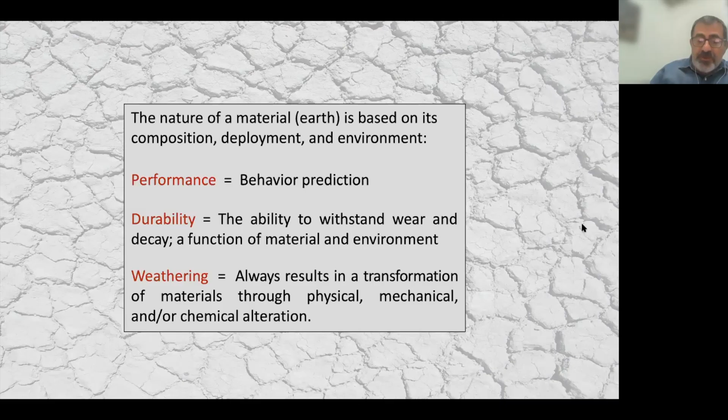The performance of all earthen building materials begins with soil composition, including clay chemistry and grain size distribution, or granulometry, which significantly determines a soil's properties and how it has been best selected for use in construction.

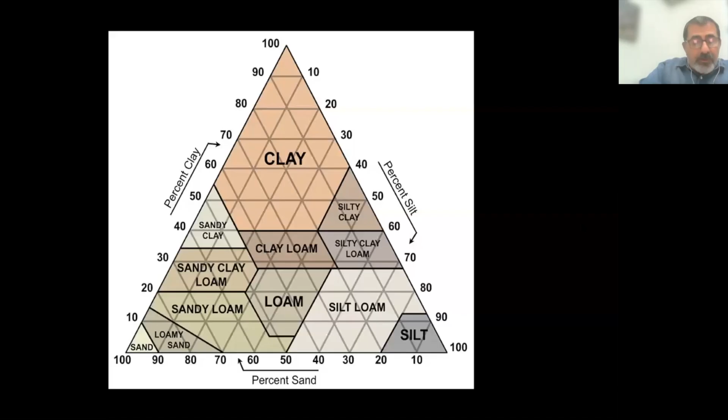Those of you who are involved in earthen building know that the type of soil very much dictates how that soil can be used and limits the options in construction. This is best expressed through soil classification systems, which for engineering purposes focuses on grain size distribution of the clay, the silt, and the sand fractions.

Over 50 years of modern scientific study of earthen heritage, and even longer empirical knowledge of earthen building, has resulted in a general understanding of how earthen architecture weathers. I just show you two examples here.

At the micro scale, clay swelling and shrinkage coupled with decohesion of the clay-silt-sand agglomerate are the fundamental mechanisms responsible for soil destabilization, which will eventually lead to all scales of damage. It starts at the micro level, but we perceive it generally in the field at the meso and macro scale.

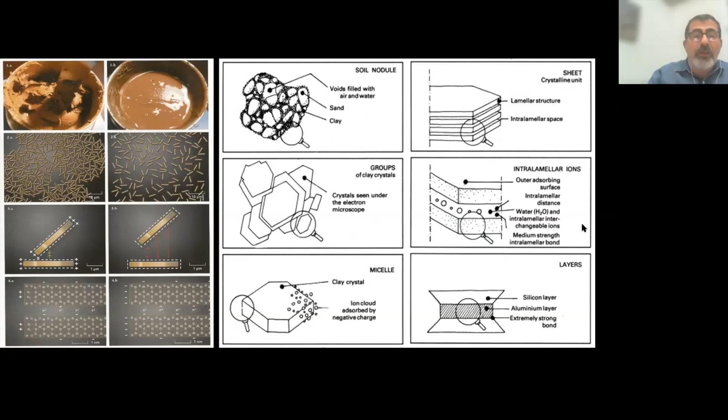We see this at these scales as characteristic conditions: coving at the top, basal erosion at the bottom, contour erosion across the entire surface, and rilling in terms of focused, concentrated damage. All of these are ultimately water-related phenomena.

These microprocesses can be aided by the presence of salts or the formation of ice within the pores of the soil, leading to additional material stress and fatigue. Eventually, with the loss of surface and reduction in wall thickness, the walls will begin to take on their characteristic weathered shapes and contours, cracking, and so on. This all depends on the cyclical weather patterns, the wall geometry, and any interventions made in the past.

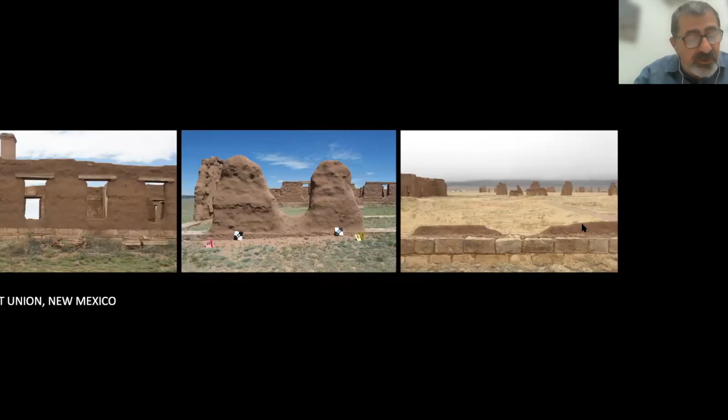Walls will weather to fanciful contours and eventually lean from basal undermining and a lack of lateral support from the original architecture, eventually leading to destabilization and collapse, as you see here on the right.

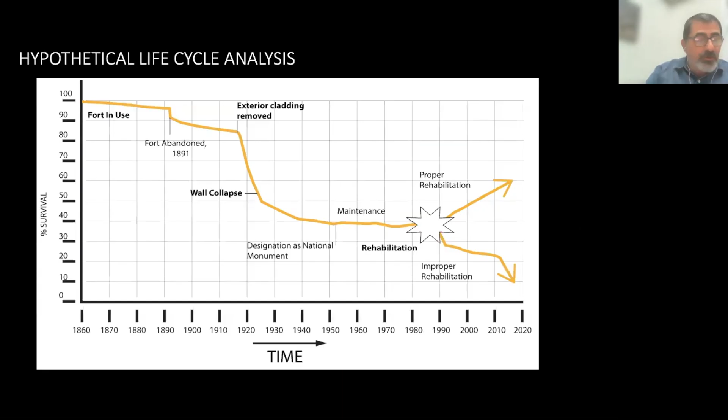Performance scenario prediction, an example of which you see here for Fort Union, is a useful evaluation method, even more so with climate change and the unanticipated responses of traditional materials and construction systems to these new environmental stresses. So let's take a simple and then a complex look through the aid of animation to see the common scenarios of earthen wall deterioration.

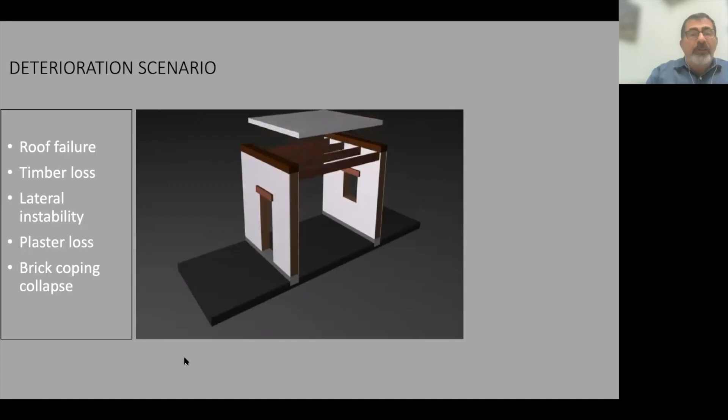As we go from a complete building to an incomplete building, we lose the roof, we lose the lateral bracing often provided through the roofing structure, and we lose the protective plaster surfaces, exposing the adobe or earthen core. We further lose additional protective elements such as brick coping or timber coping. Then we begin the next phase.

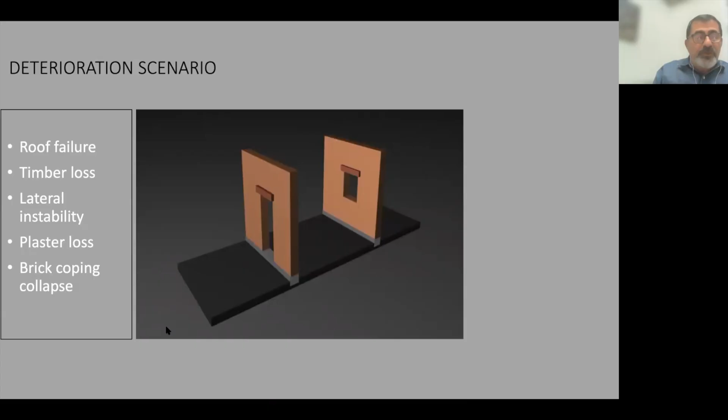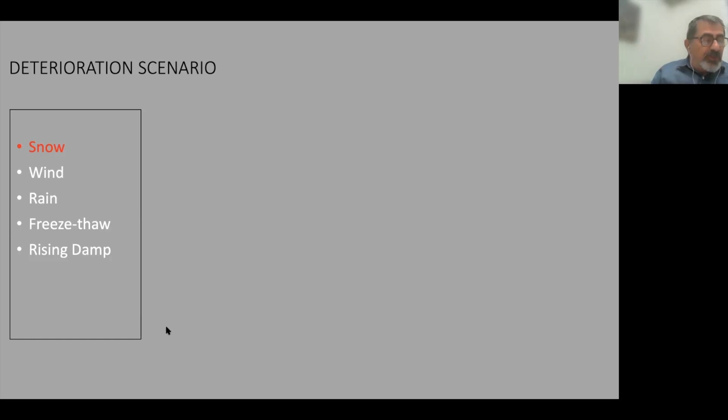Here we see the scenario which leaves the adobe nucleus or earthen nucleus vulnerable to further stressors. These stressors we understand in terms of individual different aspects of weathering, and they result in a dominant response mode. I'm just going to go through these very quickly.

Snow, particularly as a reservoir of moisture, can stay accumulated for months, depending on the orientation and protection, and eventually overwhelm the system. We'll see more of that in a minute.

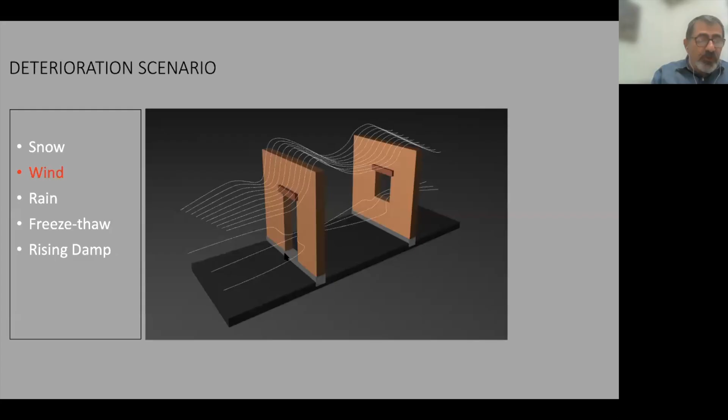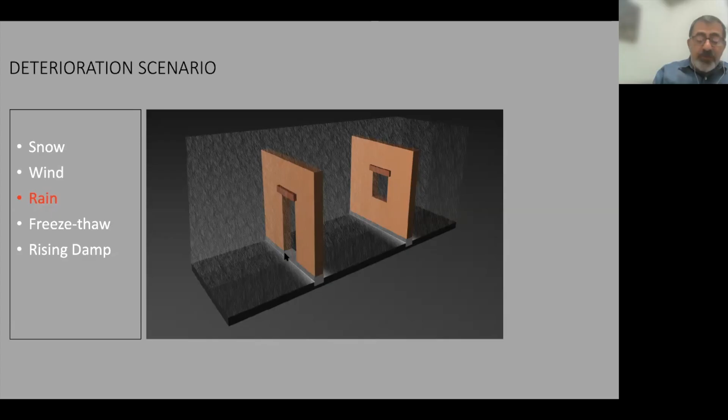Wind can provide unseen forces, often complex in terms of positive and negative wind loading. Rain, of course, falling or damp, will typically erode unprotected vertical and horizontal surfaces in a gradual disintegration, creating the common rounded forms, rough surfaces, and coving at the top.

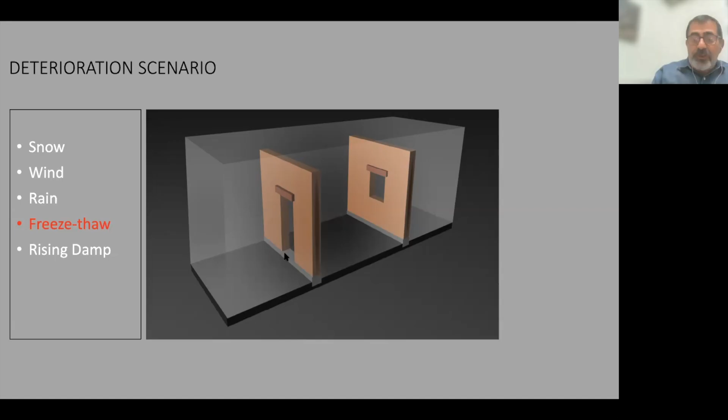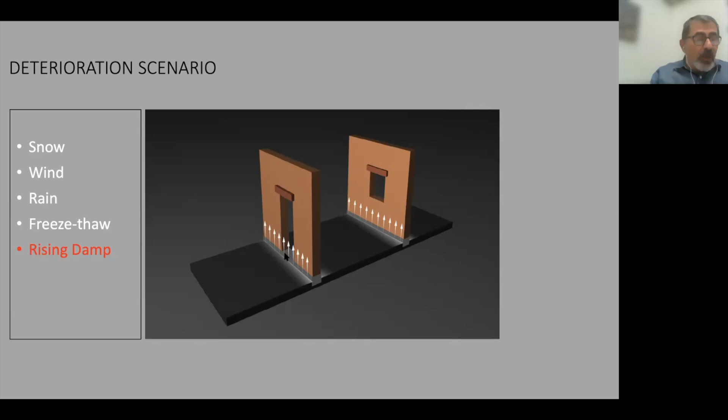Freeze-thaw will occur anywhere there's moisture, causing micro damage which eventually accumulates into meso and macro scale. Finally, rising damp or ground moisture, with or without the aided damage from salt crystallization, will cause a loss of bearing strength, deformation, and collapse. The result to the overall wall is basal erosion and coving. Again, we can see these in this animation.

These are processes familiar to most. Here we see coving at the top, basal erosion at the bottom. Then we will see the walls deforming, both contributing to an unstable wall cross-section. Then we get a whole host of characteristic out-of-plane phenomena, which cause the walls to bend, lean, pivot, and hinge.

Okay, I hope you can see these walls wiggling and moving.

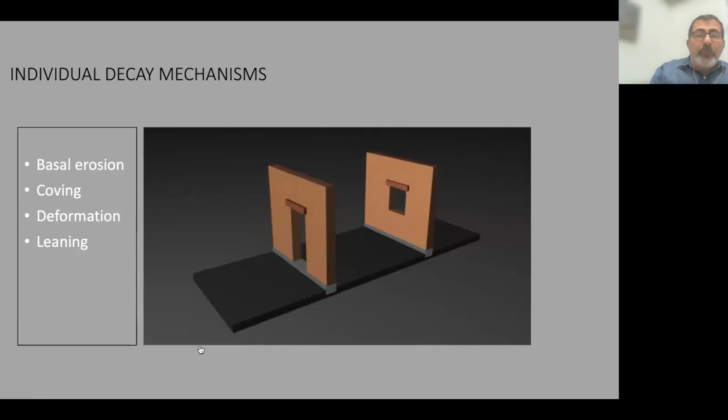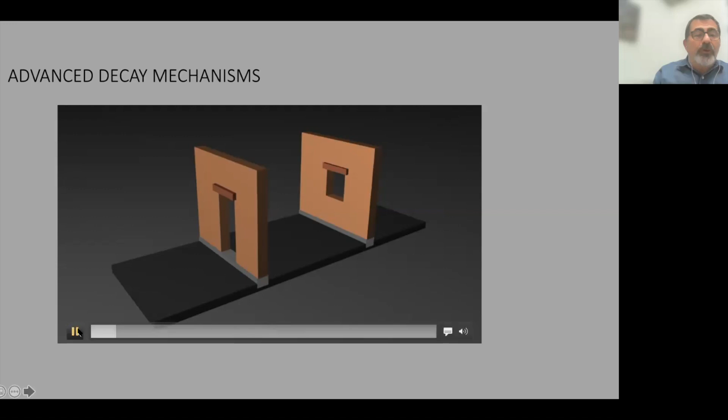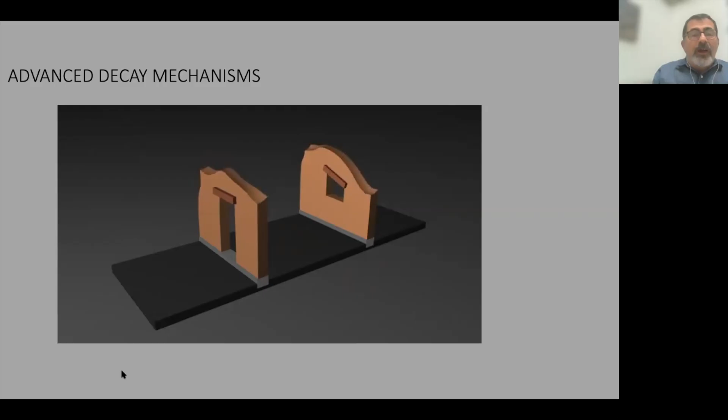Let's go on. When we look at these in combination, we have a perfect storm of earthen deterioration. Those of you in the Southwest certainly are familiar with these resulting forms. Remember, we tend to see the in-process or final form. All deterioration, particularly earthen deterioration, is like watching a film where you're at any given moment looking at one frame in a continuum of evidence.

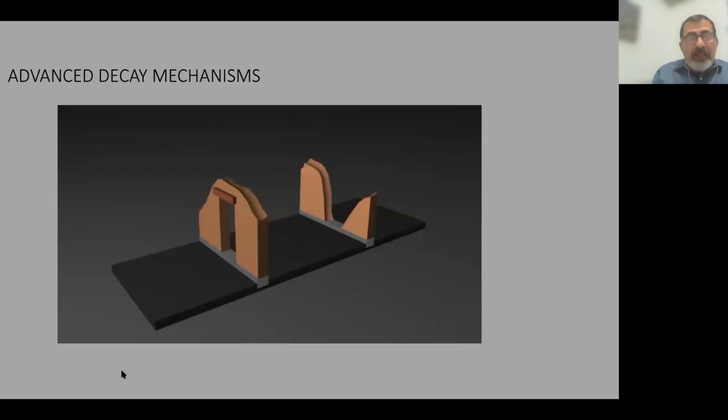Here we see the characteristic geometries of the wall creating the forms we see today through differential erosion. There is little evidence-based research which has attempted to study or explain the range of variables, alone and in combination, that influence earthen building performance, including deterioration at the macro or site scale.

There's been tremendous advances in understanding soil performance and earth material performance at the micro scale, but we have not done a good enough job looking at the combination of factors in tandem that create a synergistic decay phenomena.

While all earthen structures display similar mechanisms of failure based on shared properties and construction methods, understanding the variables of deterioration in terms of type, extent, and frequency as a function of intrinsic and extrinsic factors would allow conservators and resource managers to make better predictions about site risk and vulnerability, and therefore more effective treatment decisions. Evan is going to talk about current research we've been conducting at the University of Pennsylvania at Fort Union National Monument with the National Park Service on developing a model for determining site vulnerability through a series of discrete studies of adobe performance at the micro, meso, and macro scales.

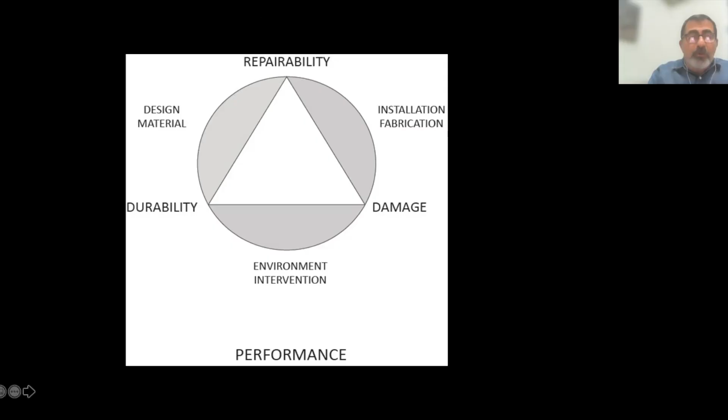I'm going to pick up from where Frank left off and try to provide a little more detail into some of these concepts in terms of earthen deterioration. Particularly, I want to present this concept of looking at earthen resources and earthen architecture from a systems approach, borrowing some concepts and terms from general systems theories that came out of the 70s in terms of how we understand things as open systems.

From a diagnostic perspective, earthen structures are some of the most complex that we have. They're also some of the most climate sensitive, which feeds some of that complexity. And while we can break things apart into certain variables and factors to monitor, the whole is greater than the sum of the parts from a systems perspective. I think a lot of people here today understand that.

I just wanted to show a quick picture. I was on site the other day at Pecos National Historical Park, and in one photo it's so hard to even summarize all of the various complexity we can see in an earthen structure. For folks who don't know, Pecos, the original walls there are treated and maintained through an encapsulation of veneers, amended veneer adobes.

Which increasingly creates a very complex diagnostic system. You've got the influence of rodent damage, which you can sort of see, you have differential weathering, differential maintenance cycles, and it's very difficult to understand how all those things are playing against one another in real time.

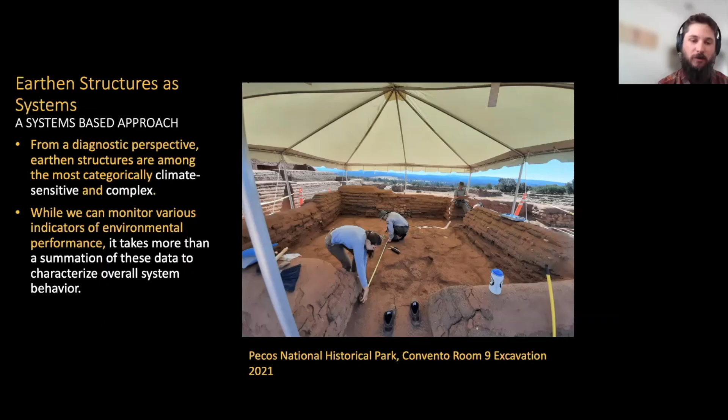So basically, taking a systems-based approach means looking at deterioration of a resource across scales. Frank mentioned macro, meso, micro, but also, when it comes to existing structures, particularly earthen structures, there's way more unknown than known variables, so we have to try to account for some of that uncertainty in our evaluation.

That usually means trying to account for material construction, initial design versus what was actually built. A lot of these things we call inherent factors, maintenance strategies, as well as extrinsic factors that look at differential orientation and exposure, things at what we call the mesoscale, which is how certain walls affect others in terms of shading and wind loading.

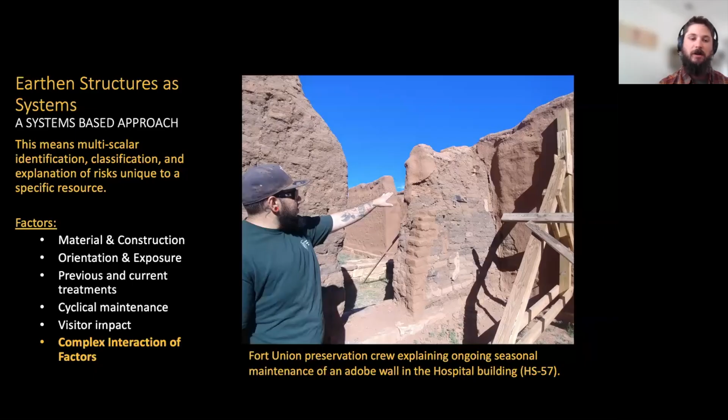What we found through these discrete experimentations at Fort Union is that really the thing that makes the most impact is the unknown or unforeseen complex interaction of those factors, which is that level of deterioration mechanism understanding that transcends the intuitive.

Generally what we found is that we have a lot of generic terminology when we apply it to earthen structures, but every earthen structure is unique. So we really want to figure out a way to catalog, characterize, and identify those generic terms, but make them - how do they uniquely manifest at a site?

At Fort Union, for example, we started with a visual index of those various factors and how they actually manifest at the site, as well as what levels of severity we see those factors manifesting at. So we try to attribute levels of severity to those things.

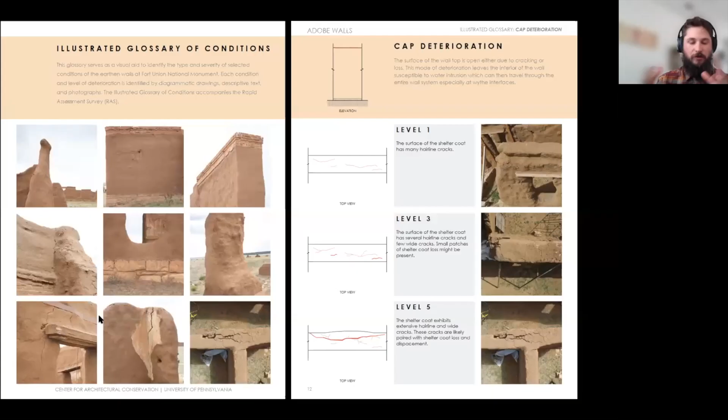Taking it that one step further, and then it's on top of this that we build the monitoring approach for the rest of the site. So now moving into how do we catalog and evaluate those factors over time through monitoring.

Again, what I said earlier, there's way more unknown than we have known factors. And a lot of that means that a lot of the factors that we're trying to understand are things that we can't quantify, things that we can't turn into numbers, so to speak.

So I'm going to talk a little bit about how we try to develop something that was flexible to incorporate both qualitative and quantitative data formats, and to try to build this comprehensive picture of how the walls and the site were performing as a whole.

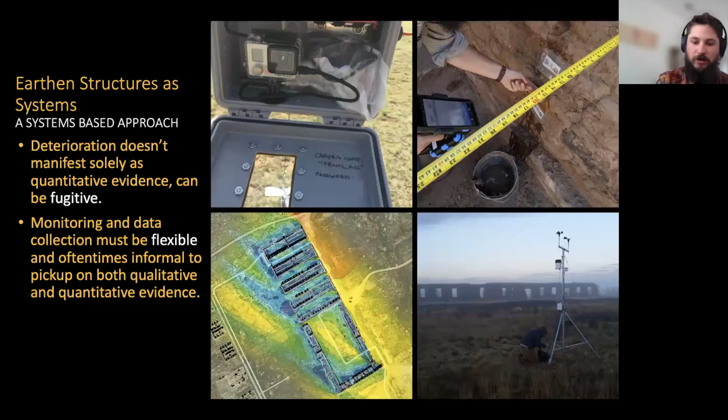Building off what Frank said, you have to really look at a resource across multiple scales, and you also have to identify where those scale boundaries exist. Where does the macro end and the meso start, and where does the meso end and the micro start? Listed there in orange are some of the different monitoring approaches that we took and tried out.

Things that are looking at, in the micro sense, material behavior, individual building unit behavior, the masonry systems.

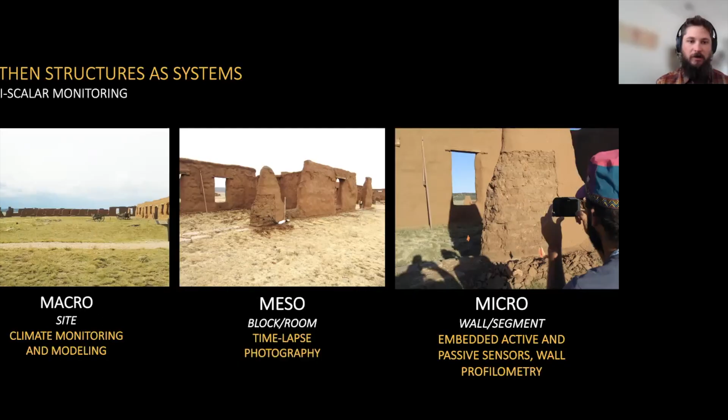And then looking at, for example, things at the meso, at the block or room level - how do the walls all interact with one another? That's looking at things like solar gain and aerodynamic shading, and then trying to build that whole picture on the macro scale - shifting climate baselines. How do we understand the larger trends from an environmental performance perspective?

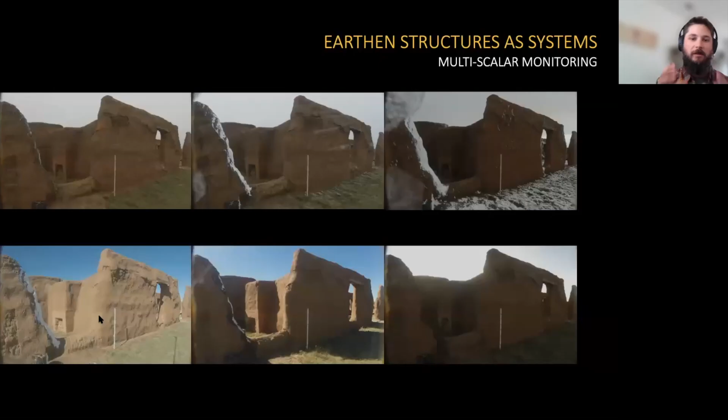And of course, snow is just basically a time lapse - it's a time-delayed moisture source. These photos are taken over 12 hours, and you can see, well after the snowstorm has passed, you still have that residual moisture on the north edges of structures. And then we begin to tie that to the very evident deterioration patterns that we see.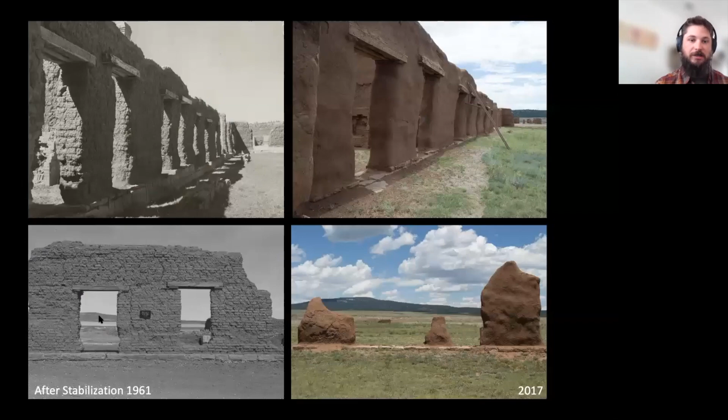In terms of embedded monitoring, we're trying to take advantage of a sort of system understanding of the walls. We originally had moisture sensors embedded, but the overall performance of an adobe or earthen structure, while very sensitive to moisture, isn't just about measuring moisture content. That's not the only piece of the puzzle we need.

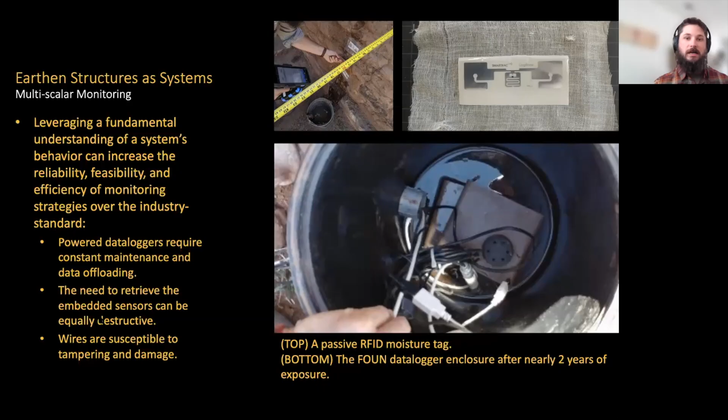However, we started to look at things like passive RFID tags for moisture monitoring, which are sacrificial in the sense that we never have to remove them from the wall. Dovetailing that with ongoing maintenance of the walls, particularly the caps at Fort Union, because falling damp through a compromised cap is a surefire formula for rapid catastrophic failure. So we try to dovetail the technology, the methodology, and an understanding of the architecture and deterioration mechanisms. We can reduce the cost of the monitoring system, ensuring its longevity and feasibility over time, as well as providing an early warning system for those walls.

Then we try to leverage computational simulation to fill knowledge gaps. It's more than just a way of creating additional data—it's really about exploring those factors and interactions of variables for which we cannot collect data. That's where computer simulation really steps in.

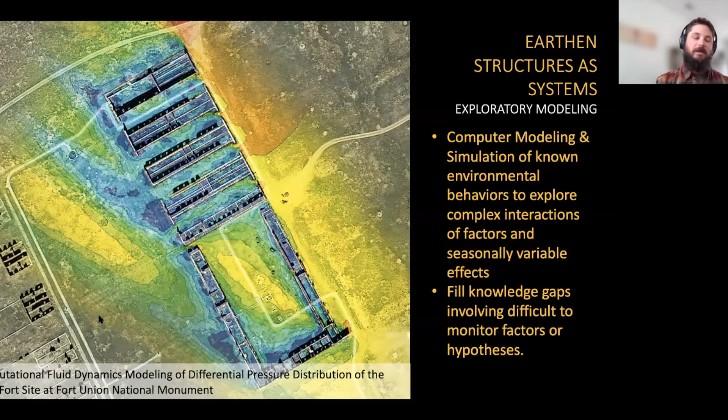Here's some early preliminary simulation we did that looks at, given average and extreme wind patterns across the site, how those walls begin to affect one another. So that's at the macro level.

Now we're looking at the meso level, trying to understand, for example, on high solar-loaded walls—walls that get a lot of sun, east, west, early morning, late afternoon—when you pair that with wind patterns, where a wall is in a negative draft zone with no wind movement or convection across the surface, doubled up with solar gain, you get a compounding increase in the heat transfer coefficient of that surface, which speeds up drying. You can see how we're starting to put these variables together through exploratory modeling.

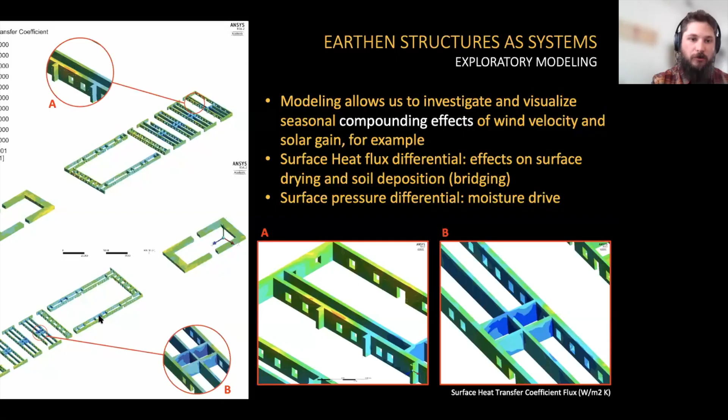Then again, bringing in the qualitative aspect: on the right you see a photo showing how wind moves across the site. Between the depot buildings you get drift snow—heavy wind comes from the south, hits the south-facing surfaces of those buildings, passes over, and the snow being carried slowly drifts down in between. Those areas are shaded, on the north side of those very tall walls, and that snow stays and lingers for months.

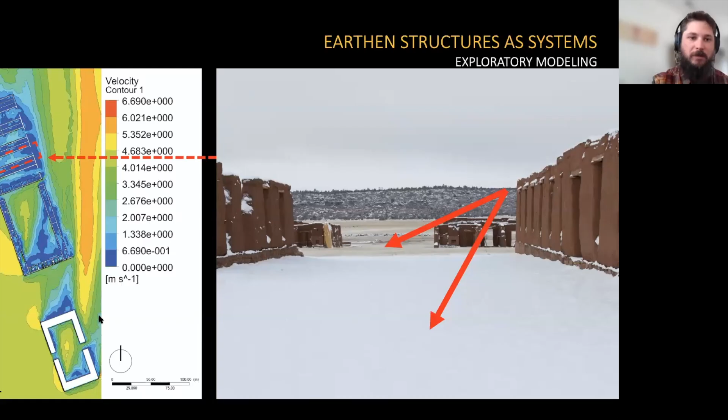That begins to explain why we see increased deterioration patterns on north faces of earthen structures—it starts to build that comprehensive picture. That's what we try to do at the end of the day: take all those various formats—qualitative, quantitative, longitudinal data—and build an environmental performance snapshot of how certain walls behave over time, seasonally, and understand how we can leverage that to improve maintenance strategies and help prioritize walls for maintenance.

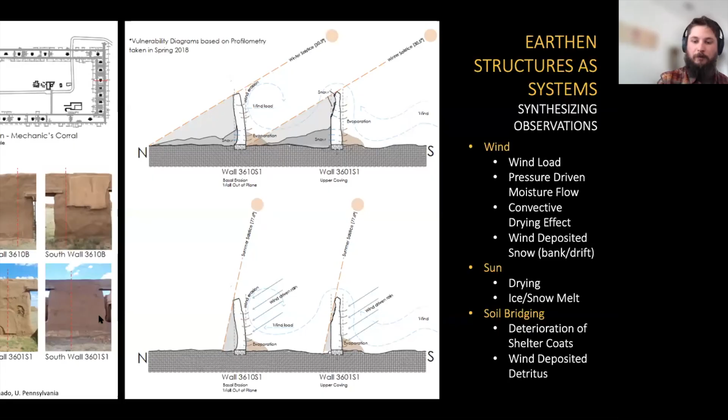In conclusion, Frank had talked about how earthen structures, through various deterioration mechanisms—leaning, basal erosion, things like that—all follow a trajectory, entropy and that kind of thing, and they all have a unique end state from a performative aspect. We just have to understand how our interventions, treatments, and understanding of what we're doing to that wall affects that end state.

So we have to take our snapshot understanding and monitoring and still try to build the overall picture of how the walls are behaving from a systems perspective, and try not to get tunnel vision on any one particular aspect.

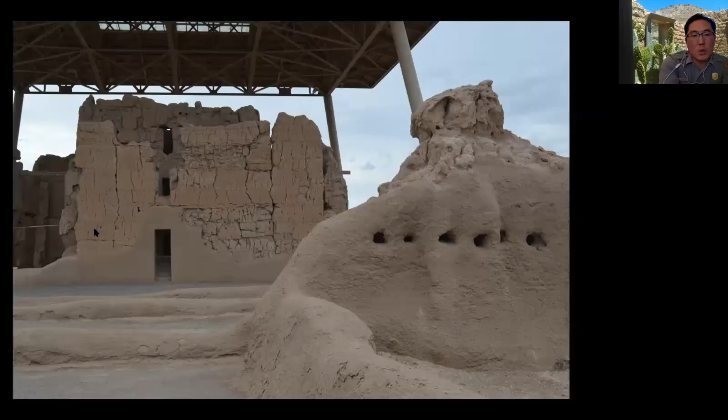Accepting weathering to be seen and to be experienced is the same. When we obscure or deny weathering, then that site may not register as inherited. Instead, it would seem new and even unnatural at times. As we've learned from the previous webinar, even decaying walls are part of a landscape that represents an ancestral connection. Sometimes letting things weather can be the most normal and respectful action.

We sometimes see at a heritage site strikingly new intervention with straight lines and sharp edges. Of course, in time, new intervention will weather. The lines will soften and the edges will chip here and there. There is a clear tension between certain interventions and the original form and fabric. Balancing this tension is a critical and necessary part of site stewardship.

In order to do that, we must first understand weathering and deterioration. At a microscopic level, deterioration is, of course, a function of selected materials. Earthen materials deteriorate rapidly, but materials alone do not bring about change. You need an environment that causes the chosen materials to behave in certain ways or to interact with other matters. For example, in this photo, the structure under the shelter experiences a different environment compared to the remains in the foreground.

How materials are put together, the design and the execution of the intent also impacts the durability. How the construct is used also determines how it'll deteriorate. An abandoned building deteriorates at a different rate than a lived-in building. Finally, how we repair a particular structure controls the rate, intensity, and frequency of deterioration. In other words, when we accept the factors that contribute to change, we can manage weathering and deterioration.

Here, I've illustrated the factors that dictate change, and common symptoms such as erosion, disintegration, cracking, detachment, delamination, falling, flaking, blistering, biogrowth, deformation, and displacement all happen due to the factors at a site. Rarely do they happen in isolation. Certain factors play a greater role than others. There is a hierarchy. Our job is to fine-tune our eyes for that hierarchy.

What I have learned is that considering all five factors has led me to an appreciation of a culture that's represented by the place I try to conserve.

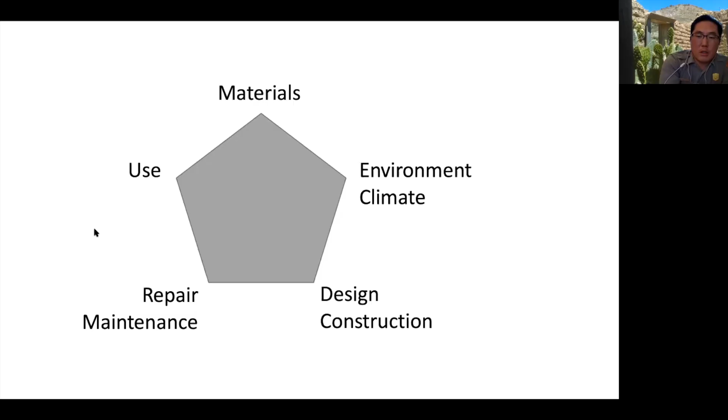Let's begin with structures of high integrity. On the left is an adobe building missing a section of stucco, revealing the masonry courses. A section of lime and sand render finished and detached. Why? Perhaps the building was left unattended for many years, or perhaps the craftsman's skill was subpar.

All of this could have caused a change. To the right, the loss of surface coat is accompanied by even more serious loss, that of partial loss of the wall itself. Did the change happen because of the same mechanism? What is different about the way water moves from the roof?

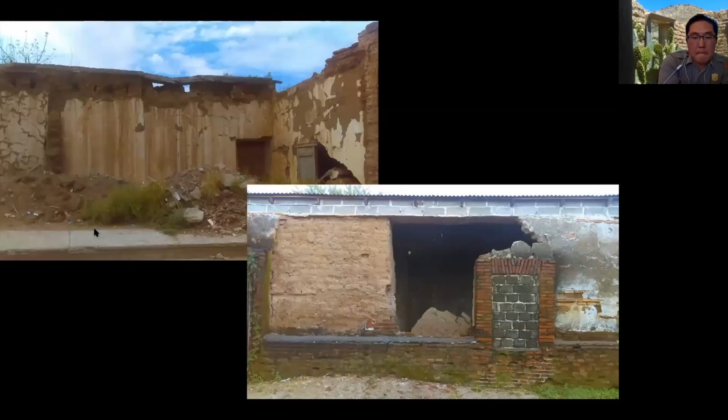Although on the surface, the symptoms may seem similar, underlying causes can be very different. Here, the progress of deterioration is even more pronounced. Without the roof, the wall top has eroded and the soil has runneled down onto the white finish, once an interior space. To the right, you see a fallen adobe wall section playing hide and seek with you. How could only a section of a wall displace while the other parts remain? So again, we need to dive in and examine various factors and rank them.

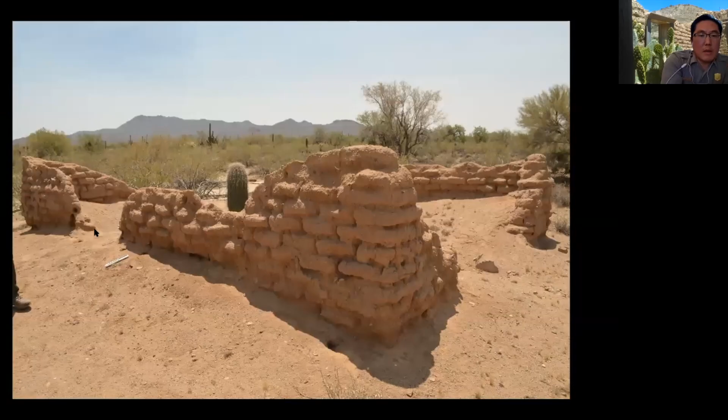Let me use this image to dissect the process called erosion in more detail. Erosion is much more complex than you think. Consider the rounded wall top. Over time, clay particles separate from sands. The free particles fall to the ground by gravity. Erosion manifests itself by a shortened wall and soil deposit at the wall base. As the particles travel to the ground, they physically abrade the wall surface, accelerating the erosion.

Watery soil basically pours down the walls and behaves like a liquid. Another type of erosion takes place at the wall base. Water wicked up by capillary action deposits soluble salts from the ground into the walls that crystallize to greater volume. So render, adobes, even bricks and rocks break apart because of the expanding salts over time.

The details in design, construction, and craftsmanship are evident through differential erosion. The details matter. If you want to make sense of it all, you must have a solid understanding of soil and earthen architecture. That is the very first step in understanding deterioration.

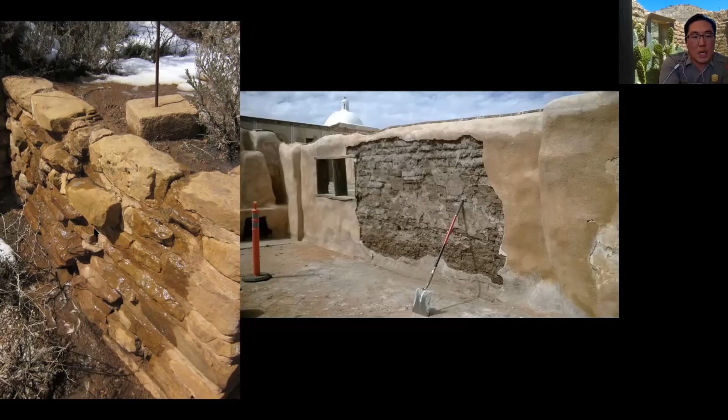If someone tells you that deterioration in the images are caused by freeze thaw, what would you say? Obviously, you want to see if the temperature drops below freezing, but is that enough for freeze thaw? What else do you need for freeze thaw to damage porous building materials? Are all porous structures the same?

I will not explain the whole thing in the interest of time, but let me emphasize this: if any one of the conditions is not met or is contained, deterioration will not happen, or at best progress slowly or differentially.

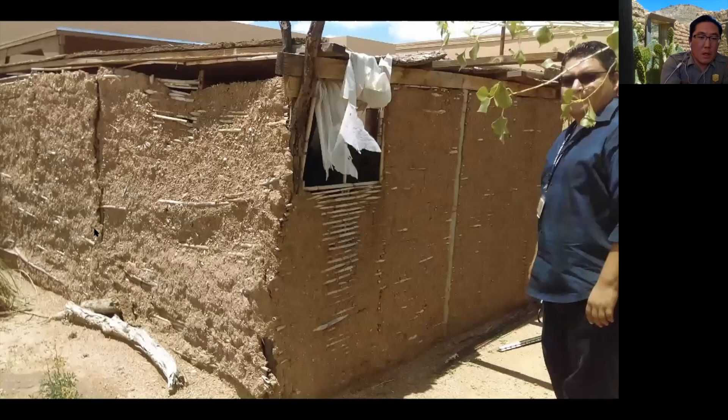Heritage stewardship is a total and holistic process. A symptom you see might be just a small perfect storm happening at a microscopic level. And if you let these small perfect storms go uncared for, they'll become an even greater storm.

Also, think about who you're doing it for. Some of the architecture are still living quarters. What you call deterioration could be a totally acceptable condition for people with different cultural beliefs.

Let me wrap up. For heritage stewards, change is normal. It sounds ironic considering that we preserve and sustain. But in accepting change, we are accepting that we are willing to observe first before rushing to intrude. In accepting change, we are accepting that we are not the only stakeholders of a place.

As with other professional disciplines, earthen architecture conservation starts with the basics. It begins with observing. It begins with understanding soil. It begins with understanding local climate, and it then progresses to appreciating how building materials are put together by different cultural groups.

From there, it'll take you to another level. You'll see how a particular culture has come up with a design solution that prevents a wall from getting wet or remaining wet for too long. When you experience all that, then you'll become much more careful in selecting repair materials and methods, since it can fundamentally change what that place will become.

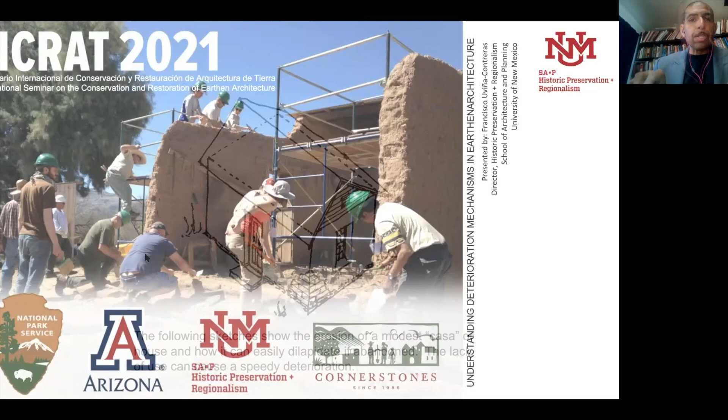Welcome everyone to a new seminar with a quite interesting subject, and I hope you enjoyed the prior presentations from all of our panelists. So my presentation will be a combination of sketches and photographs to support my explanation when it comes to the pathologies that these buildings go through in a variety of different conditions.

As we have seen in the past presentations, I would like to start with a series of quick sketches showing how a modest adobe structure can fail with the passing of time, especially when they are abandoned and have a lack of maintenance done to them.

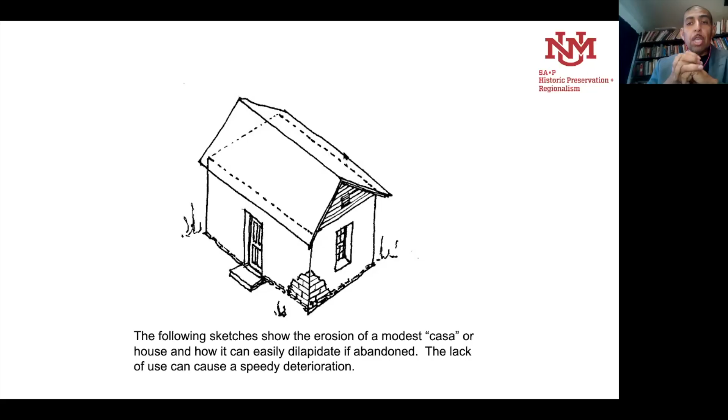Observe the first slide showing the start of the metal roof starting to detach, exposing the rafter and roof structure. The following drawing shows how the same building begins to lose most of the metal roof covering, exposing large amounts of wood structure. Notice how the plasters and the adobe material start to accumulate at the base of the walls. The major reason for these images is that it exposes the vulnerability of a building when it's not in use.

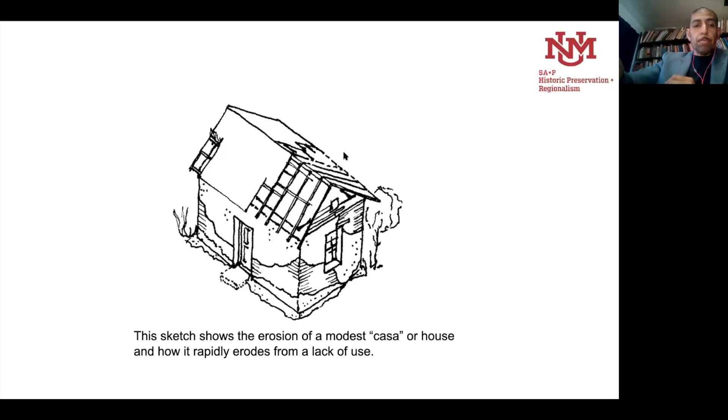In this other sketch, notice how the metal roof sheathing is basically gone, exposing most of the wood members and the slow disappearance of the rest of the wood elements, such as the purlins. Now we have most of the plasters and part of the eroded adobes accumulating at the base of the wall.

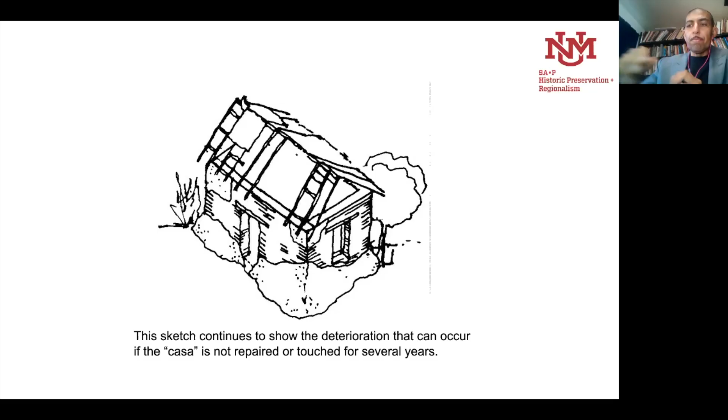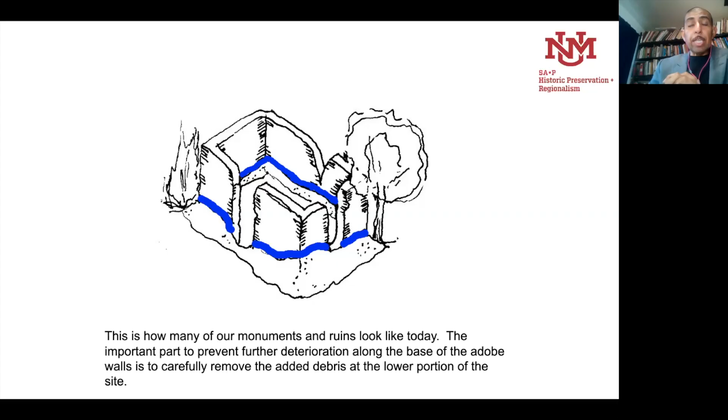The last slide depicts how the structure has entered a state of self-standing walls with an accumulation of debris and rubble at its base. The accumulated earth, plaster, and other materials can cause major issues at the base of the walls. It acts similar to a concrete apron, wicking moisture and seeking a point of expulsion. This usually takes place where the rubble meets the exposed adobes, as seen in the blue line in the drawing.

The capillarity action occurring in these two images is evocative of the sketches shown in the first four slides. The previous slides presented the disintegration of the adobe substrate material when exposed to the natural elements—its mortars, lime plasters, and earthen roof decay and other materials now sitting along the exterior and, in some cases, the interior walls as well. Many factors can be taken into consideration, such as rain, snow, wind, and others.

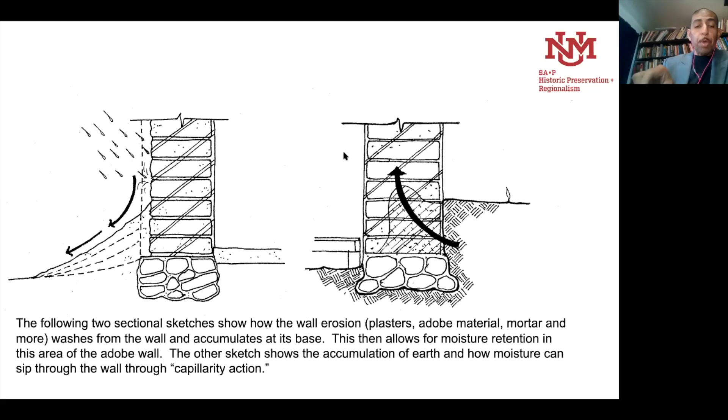The other sketch shows an exterior grade with several inches of backfill sitting next to the wall, a condition detrimental to the adobe walls. These two examples relate to the previous drawing sketches.

The image to the left, a large casa or house in the town of Casas Grandes Viejo in the state of Chihuahua, depicts an accumulation of soil from a recently fallen adobe structure that once surrounded a patio or courtyard. The exterior grade easily accumulated many inches over the original exterior grade of the house.

The one on the right depicts one of the many abandoned adobe walls in the southern part of the state of Chihuahua, at La Hacienda de Sombreretillo. This hacienda was rehabilitated and converted into a seminary for the local diocese in Hidalgo del Parral. Notice how many inches the wall was buried.

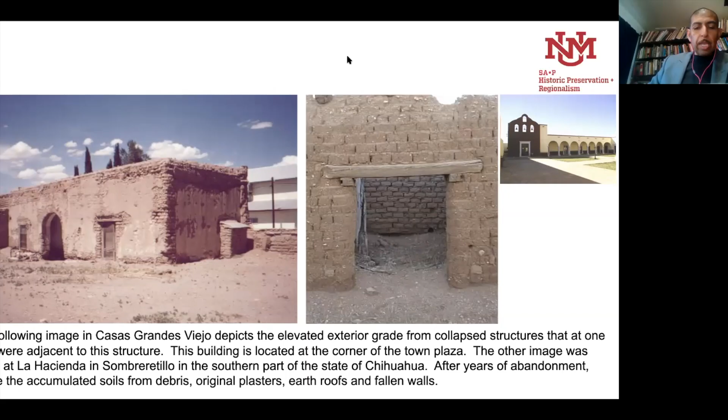This extra material came from the earth roofs, plasters, mortars, and many disintegrated adobes from the top and sides of these walls. This effect can cause major issues where the soil meets the exposed adobes.

These two other examples show us the extensive damage where the top of the debris meets the exposed adobe wall. Another factor is the dirt road that runs parallel to the adobe wall, causing splashing of mud onto the side and contributing to the deterioration of the wall. The one to the right is also located in the town of Viejo Casas Grandes.

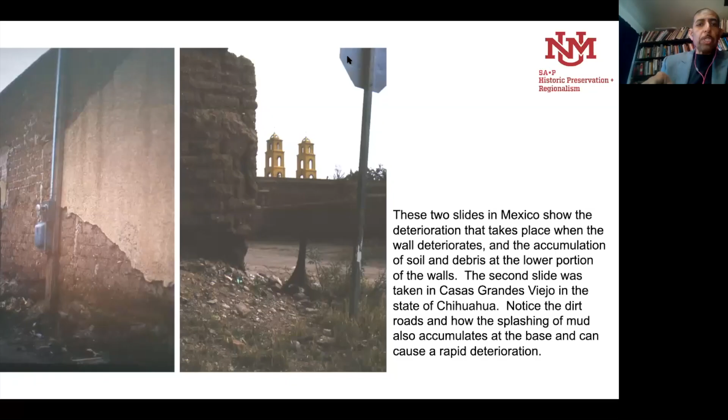The following three slides show us a two-story warehouse and molino, or mill, in the community of La Cueva near the Mora Valley. Some of you might know this site for its famous raspberries grown at the Salman Ranch, basically around the corner from this building.

What about wind erosion, which is quite common in our dry and arid region? The following slide shows a ruined mission near Viejo Casas Grandes, where the effects of wind erosion are imminent.

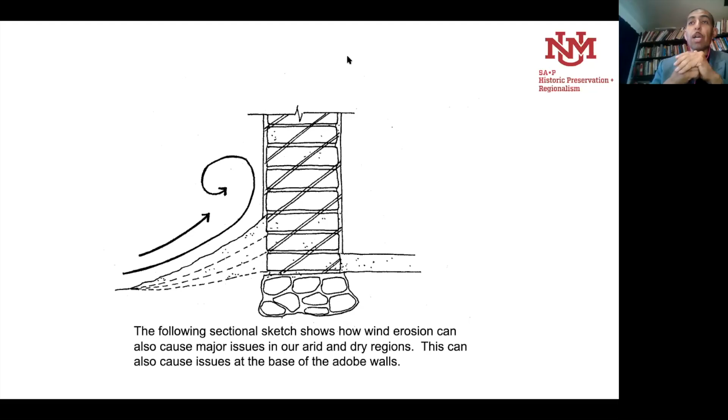This sketch shows how loose dirt near and around the site tends to settle along the side of the walls. Of course, it depends on how the prevailing winds impact the wall, causing serious erosion along the face of the wall. This example, which I already talked about briefly, depicts the accumulation of soil from the eroded walls.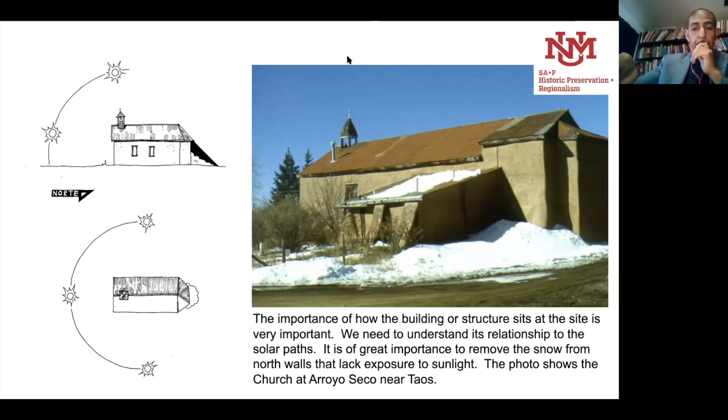Freeze-thaw, as mentioned in earlier presentation, is a serious problem in cold regions, like northern New Mexico and some parts of the Southwest. Note the dramatic effect of a freeze-thaw cycle in the following sketch. It is common when the wall gets wet, and at night when the temperature drops, it freezes the wet areas, and the following day when the temperature rises, the effects on the adobe wall can be a serious loss of material.

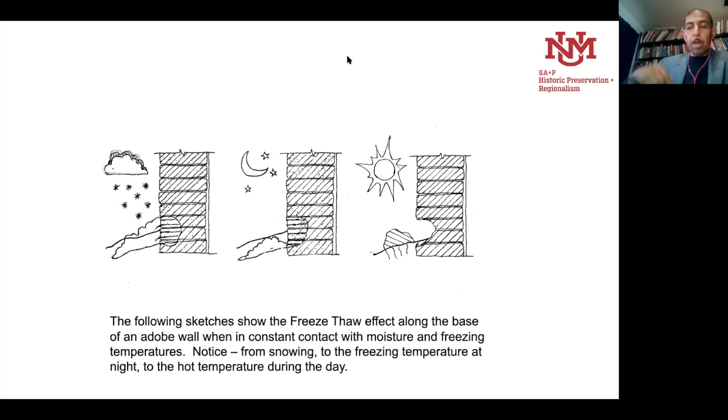The following simple sectional sketch depicts earth roof loading on the walls. Do not remove the earth roof, only if you need to replace pieces of wood or need to make serious repairs. The other thing to do, if you are removing an earth roof for repairs, put it back after repairs. But do not forget to place a geotextile down on the deck to prevent the soil from filtering through the roof structure. I will not get into the details of roof construction, but by keeping the load on the walls, it stabilizes the walls and keeps them in place. Note the following photographs for examples.

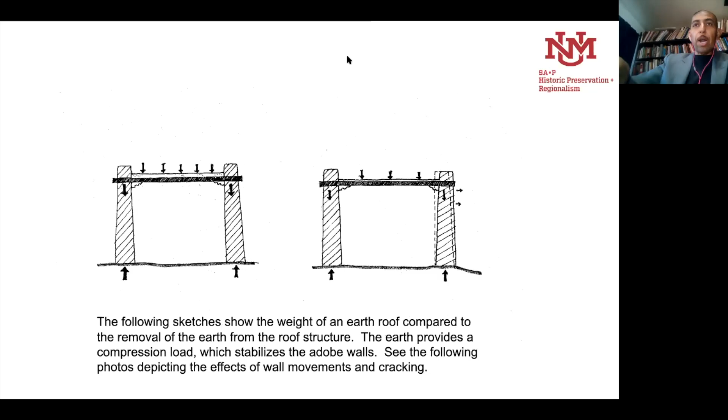This slide shows a church structure in the Sierra Tarahumara in Chihuahua. Notice the large cracks and corner separations. Perhaps we have several factors affecting the walls, but one for sure is the lack of an earthen roof. And with the poorly constructed roof structure, we now have lateral loads pushing walls apart. The dramatic cracks and structural deterioration was attempted to be remedied with the application of a buttressing system.

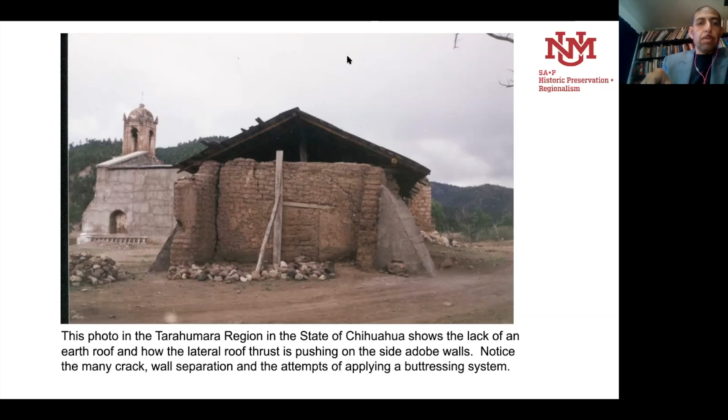These two drawings show a lack of good termination in the downspouts. Notice the damage that a missing pipe can do to an adobe wall.

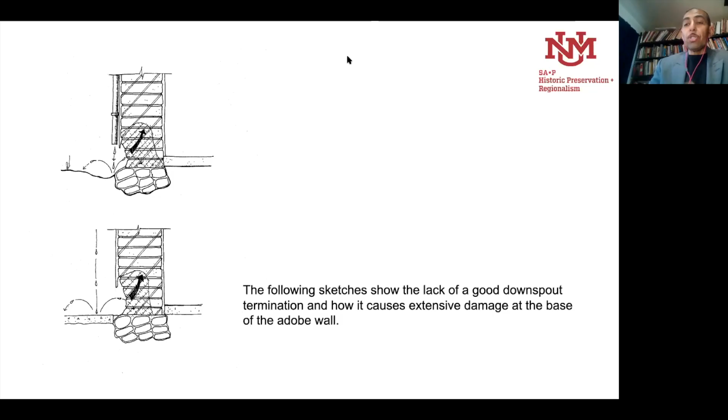The following slide shows the damage in the Santuario of San Lorenzo in Bernalillo. The wall image shows the serious damage caused on this wall. Not only did it erode the original lime plaster, but also a few inches of the adobe wall. Notice the lime plaster on the wall. It is the only wall in this church plastered with a scored lime plaster with an ashlar masonry appearance. This method of lime plastering adobe walls was commonly seen before the use of cementitious plasters.

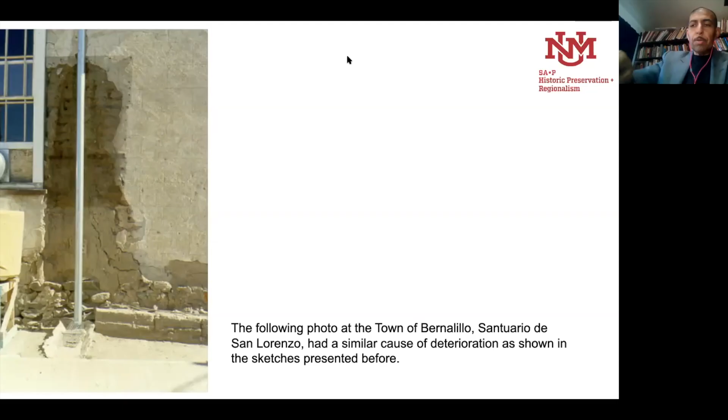These two sketches show the difference between a flat roof adobe structure compared to a pitched roof building. They both erode differently. The flat roof structure parapet walls, for example, easily get rounded because of rain, snow, and wind erosion. That is why the Santa Fe style or the Spanish Pueblo Revival style started to utilize round parapet walls in their design of these types of buildings.

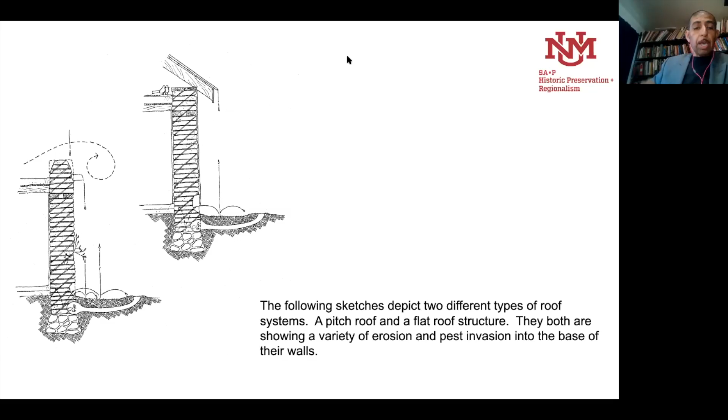However, the pitched roofs hold many surprises, from pigeon and rodent droppings to bat guano. It requires constant sealing of all openings to prevent the inhabitants of these pests to occur. Notice the wall, notice the base of the wall where rodents have excavated the lower portions of the walls. This can easily affect the basal structural parts of these adobe walls.

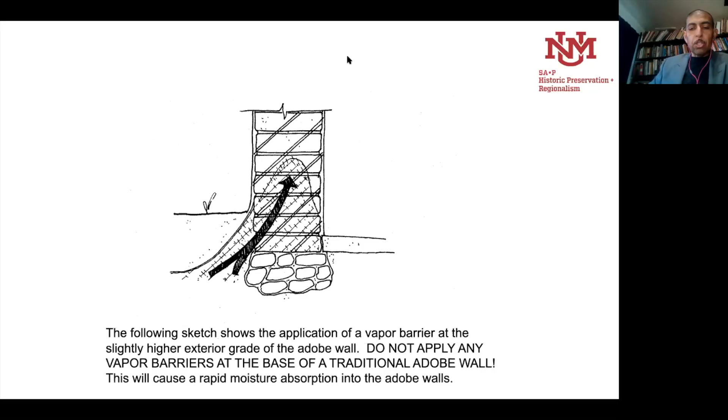Do not apply vapor barriers along the walls. I have seen all kinds of plastic coverings, including geotextiles, that retain small amounts of moisture next to walls. A vapor barrier will retain moisture along the wall that eventually the adobe walls will act like a sponge and absorb the moisture. Beware of this method to prevent rainwater or snow from filtering into your walls.

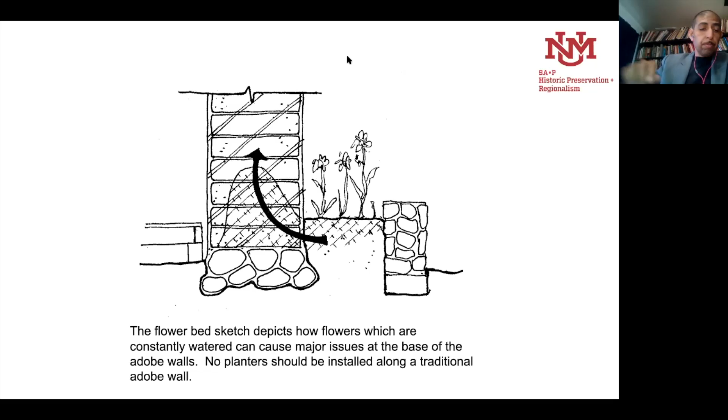Siberian elms are almost impossible to kill. Either you pull them out with the entire root system, or you kill them with Roundup in a concentrated solution.

It was not difficult to remove, and the damage was caught in time. I still don't see the reason why the concrete apron was actually applied, since the walls were laid on good, solid concrete foundations.

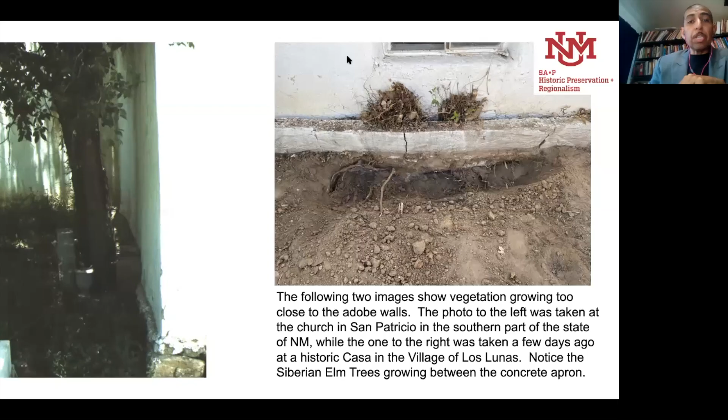How do we then control certain erosion factors when it comes to the building and its makeup? How do we make certain buildings stand? Are there ways to improve the structural stability of poorly built structures without affecting their historic integrity? These are questions that maybe we can discuss during the Q&A session.

And like Alex said, gracias.

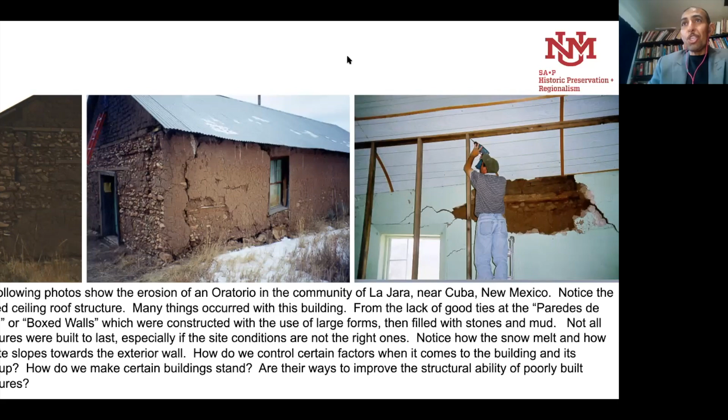All right, welcome back everyone. Again, thank you to our panelists for great presentations. I really like the overlapping themes of a systems-based approach and the emphasis on monitoring, which becomes an important tool as we begin to document deterioration and define some treatment strategies.

I want to start talking about the questions that came up. One recurring theme was resources or references for the kind of methodologies you displayed, Evan. I'm wondering if you could talk about whether there are existing resources out there, and I'd like to ask the rest of the panel to join in too.

Yeah, sure, I can certainly try. I'm trying to open the questions thing here. Can you repeat the question again?

Sure, sorry. It's really about, and this goes to even Francisco's presentation, which has some great sketches, there's a common hunger for resources people could go to other than these videos, both for the methodologies in your work, Evan, and for the kind of sketches Francisco was showing. So Evan, I'll start with you.